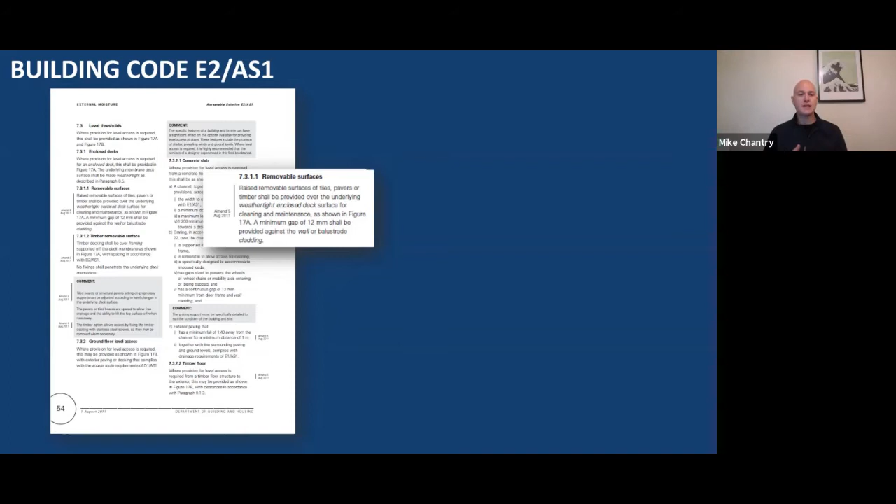When I was an apprentice, we just used to rip our joists down, staple some supercourse to the bottom, chuck them on the membrane, yahoo, we were done. But the building code changed, and it says now that it has to be raised and it has to be removable. So you can see in the section drawing there, figure 17A, there's the deck structure going over a membrane. So as you know, H3.2 joist, decking on top, and you'll see that that deck structure is set on top of a pedestal, so it's raised off the membrane.

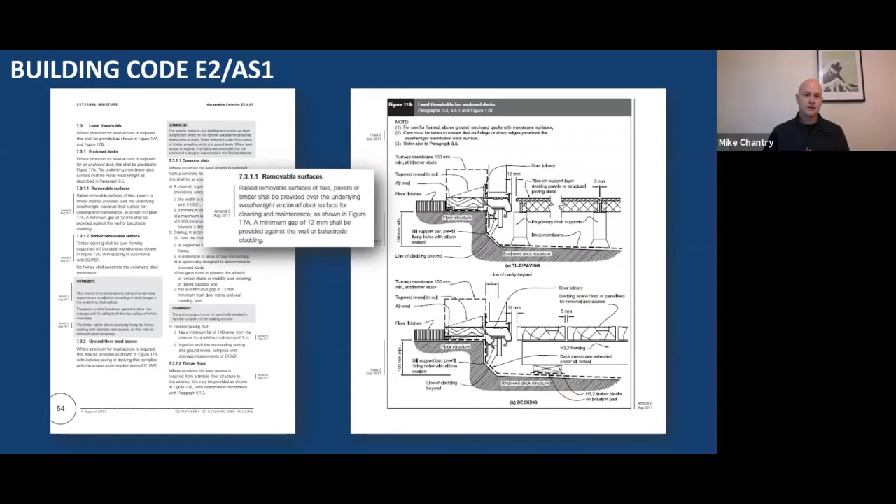So there we can see a level deck structure, a level entry, and that is supported by the Nurajack decking pedestals. So one, it's raised off the membrane, it's not sat on it, so that water can flow freely under there, and those joists aren't going to suck up any moisture that's sitting on the membrane. Two, it's removable, because those decking boards will be screwed down to the joist, or they'll have some type of clip system. So the decking can be unscrewed, the boards can be removed, and then that drain and gutter can be cleaned out and maintained and then replaced.

Now you'll notice too that the building code requires a 12mm gap from the edge of the decking to the cladding. And you know the reason for that: if you jam up your decking against the weatherboard, then water's going to sit in there and rot out the weatherboard or it's going to rot out the deck. So it needs that 12mm gap so that water can flow down and then out the membrane.

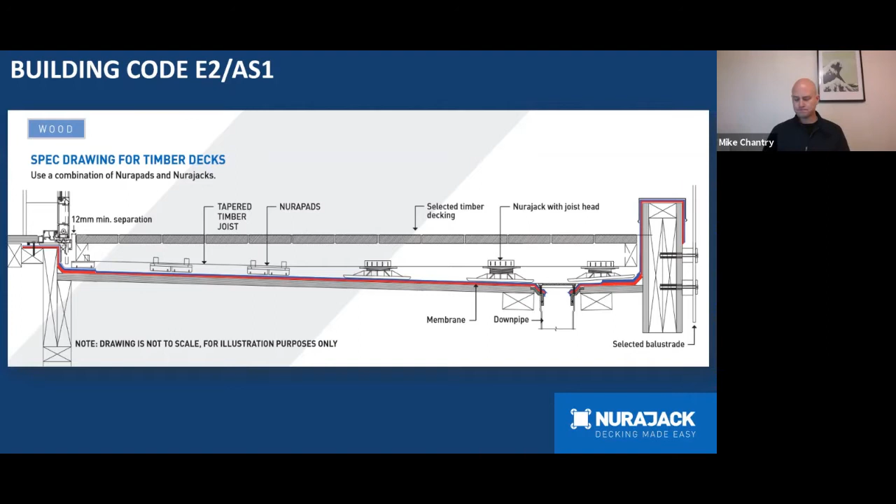And later on in our webinar, we'll talk about the products that achieve that as part of our Nurajack decking system. So that's low profile decks going over membrane. But also part of the Nurajack decking system, we have a Nuraspike and Nurajack, and this is used for doing low profile decks going over grass or going over dirt. You might have seen the Nuraspike newly released on the market just a few months ago.

Now, as you know, decks under 1 metre don't require a permit. However, that doesn't mean that we can just build the deck however we like. So even if a low profile deck doesn't require a permit, it still has to be built according to the New Zealand Building Code. So our foundations, the size of our bearers, the spacing of our bearers, the spacing of our joists all need to comply with the building code.

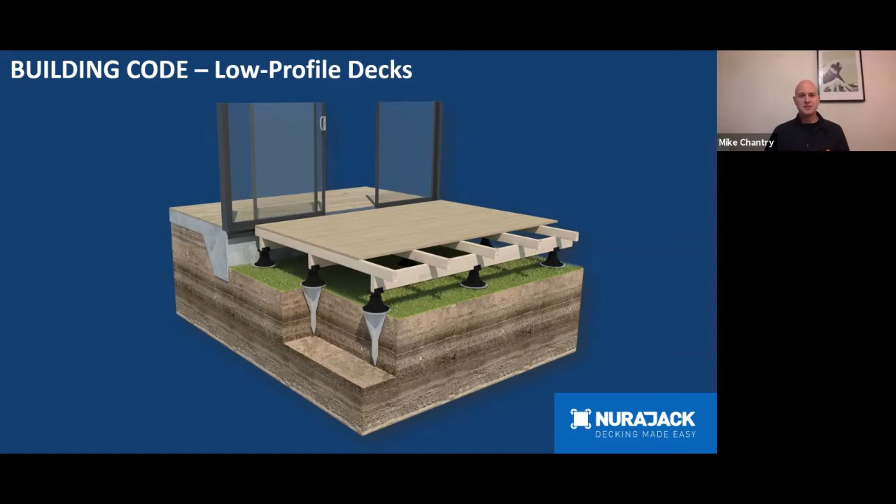So then just to review that section, why do we need to use Nurajacks according to the building code? Well, anything going over membrane has to be raised and it has to be removable for cleaning and maintenance. And even though a deck is under 1 metre and doesn't require a permit, it still has to be built according to the code.

So the next feature of our webinar is we're going to talk about some features of the Nurajacks. You might have seen the Nurajacks before or used them before. You'll notice the wide base of the Nurajack and then those fins that go up the side of the Nurajack. That means that we can put 1 ton of weight per Nurajack and it will spread the load out over the membrane. So if there's a spa pool or maybe an outdoor fireplace or something like that, the Nurajack can handle that load and spread it over the membrane so it doesn't point load and damage that membrane.

Also, the Nurajacks are easy to adjust the height of just by winding the thread up and down. So it's pretty simple and straightforward. And then you'll notice there the 35mm upstand on the head of the Nurajack. There are some holes in there so the Nurajack can be screwed into the joist and then that's all locked in place.

Now, one of the great features about the Nurajack, and something that all builders really love, is the self-leveling head. It can self-level up to 4.5 degrees, and that works on a ball and cup type scenario. So you might have maybe a valley on a waterproof membrane deck, or maybe there's a bit of a dish in the concrete. Well, that self-leveling head means that the base of the Nurajack is going to sit hard on the membrane, and then that ball and cup type design will take up the fall any which way,

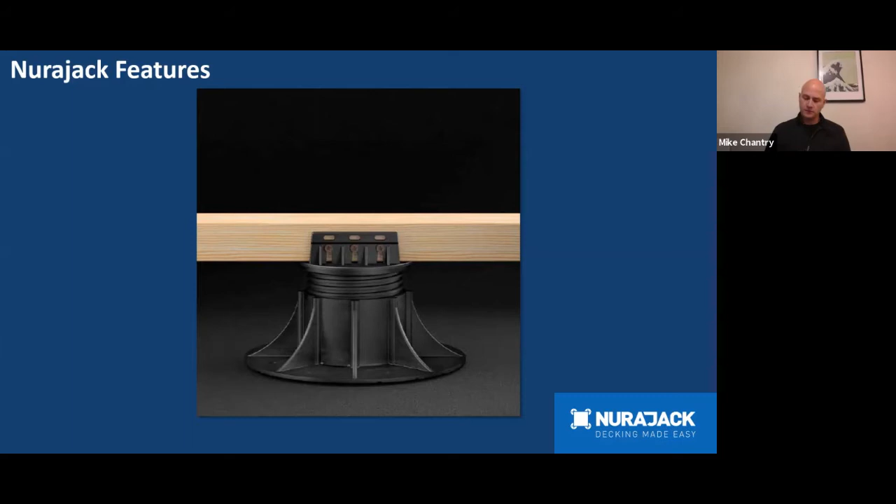Now, our range of Nurajacks goes from our smallest self-leveling Nurajack, which is the SE0. Wait, computer problems, getting late. Which is the SE0, and that starts at 28mm. And then we go all the way up to 550mm, so plenty of height there.

Now the SE0 to the SE5 is made up of a base, a thread, and a head. And you'll see these codes that are stamped on the base of the Nurajack and also on the thread of the Nurajack. Now the SE0 through to the SE2, these components aren't interchangeable with other jacks. They have to go together to make up those jacks. But the SE3 base is our tallest base, and that does the rest of the range of the Nurajacks.

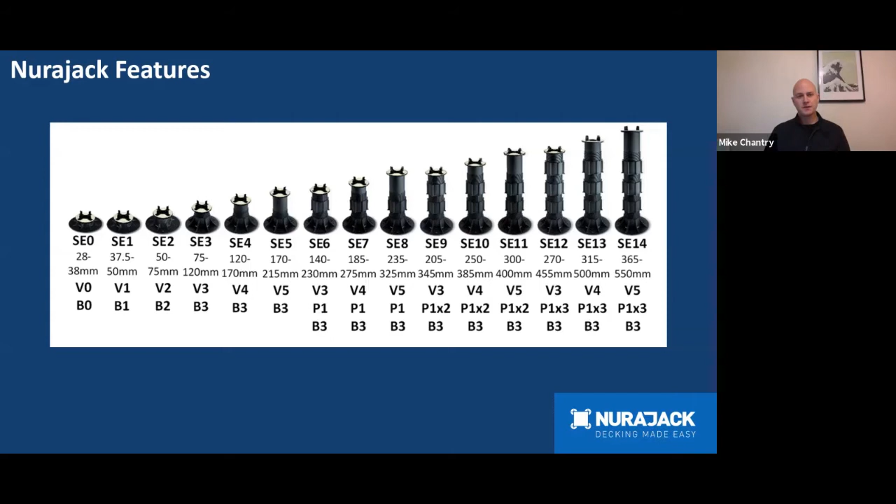Then where we get our additional height in the Nurajack is by adding an extension element. So we can go 1, 2, and then right up to 3 extension elements to get that 550 mils. So all of those jacks take 1 ton of weight. They all adjust using the thread, so winding it to height, and they all have a self-leveling head up to 4.5 degrees.

Now, our lowest profile Nurajack is the Nurapad, which is a 12mm disc, and that sits straight on the membrane. And then the joist, be it a timber joist or an aluminium joist, sits in between the tabs of the Nurapad, and that holds that into place.

Now the Nuraspike, we talked about that before, being used for low profile decks going out over grass or going out over dirt. And that's a 550mm long ground spike that gets driven into the ground using a sledgehammer, and then the Nurajack sits on top of that ground spike. Now each Nuraspike can withstand loads of 500 kgs per Nuraspike.

So the New Zealand Building Code requires 2 kPa loading on a deck. When we did our testing using the Nuraspikes and the structure that we built, we achieved 20 kPa loading. So it can handle heavy loads that are put upon it, and it's not going to sink. It's made of 4mm galvanized steel, and that galvanized steel is going to last a minimum of 20 years in the ground. So think of that as your replacement pile for your low profile decks.

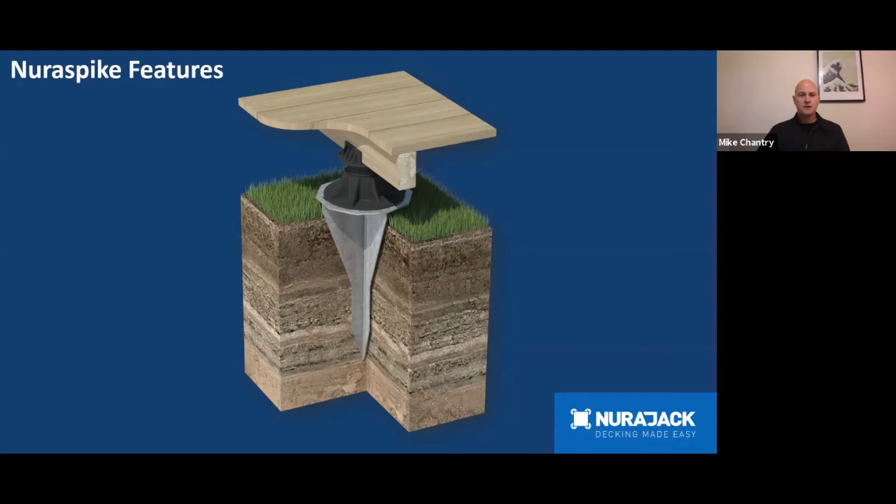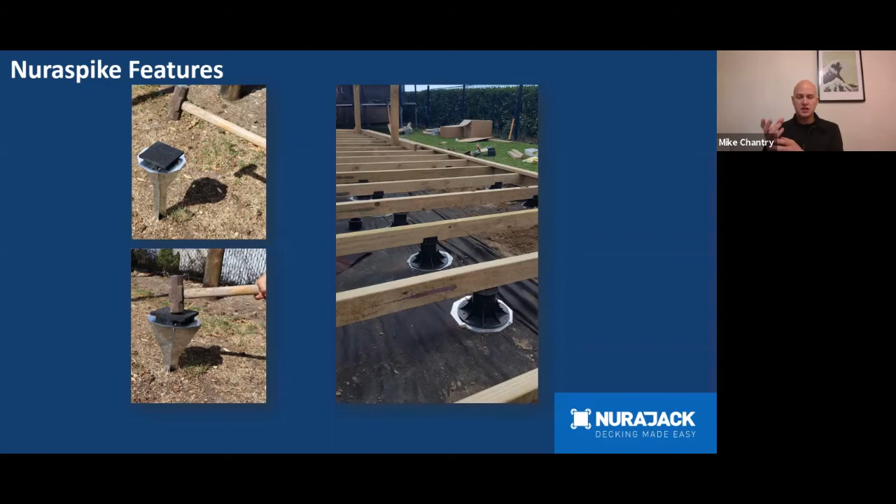So you can use a Nuraspike with a Nurajack directly under a joist, or you can use it under a bearer as well. So the head of the Nurajack is 85 mils, so you can fit a double bearer on there. If it's 90 or 100, that's cool. So again, think of that Nuraspike and Nurajack as your pile replacement. So there's a pile, Nuraspike, Nurajack, then you got a bearer on there, or you can just put it directly under the joist. Up to you, and it depends on how much height you've got.

Nurajack system also has tiles. We do a lot of tile jobs, and Lewis is the man to talk about this. Thanks, Mikey. I won't say much about this other than the jacks have the same feature of the self-leveling head, same loading, weight, and they have a special acoustic pad that's actually on top of the jack, that white rubber there that minimizes footfall. They're also adjustable without lifting the jack, and instead of winding the base like you would with a timber joist, you actually use an adjustment key.

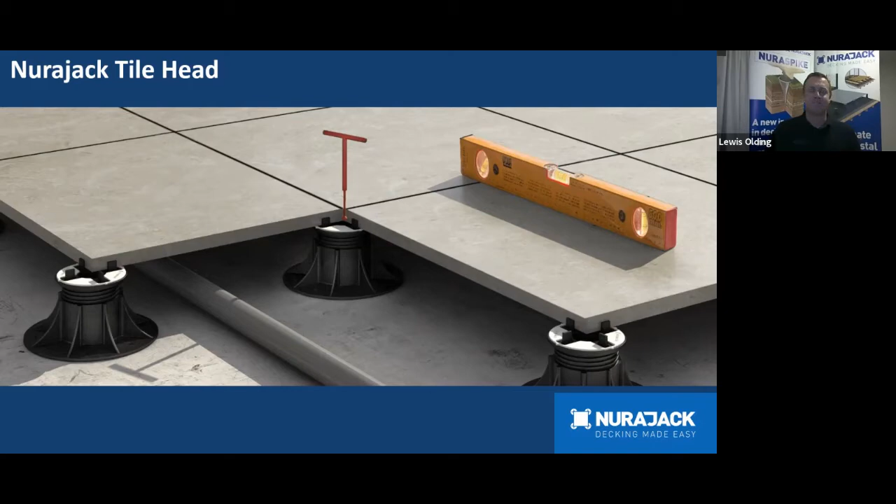Thanks, Mike. Cool, thank you, Lewis.

So our next part of our webinar, as Lewis mentioned, is installation. A little while ago, we made a video of us building a deck using Nurajacks and the Nuraspike. You might have seen that video. It's on our website, also on YouTube. We use it as training, doing in-store training, and also on Instagram, things like that.

So a couple of options they could have done to build a deck: cut up the concrete, get a digger in, rip it all out, pay to dump it, big mess, dig holes, put piles down. Or they could have cut holes in the concrete, then dug holes and then put their piles in. Or what we did is use Nurajacks and put the Nurajack straight on top of the concrete. Because that concrete was in good nick, right over the concrete area, we put Nurajacks down.

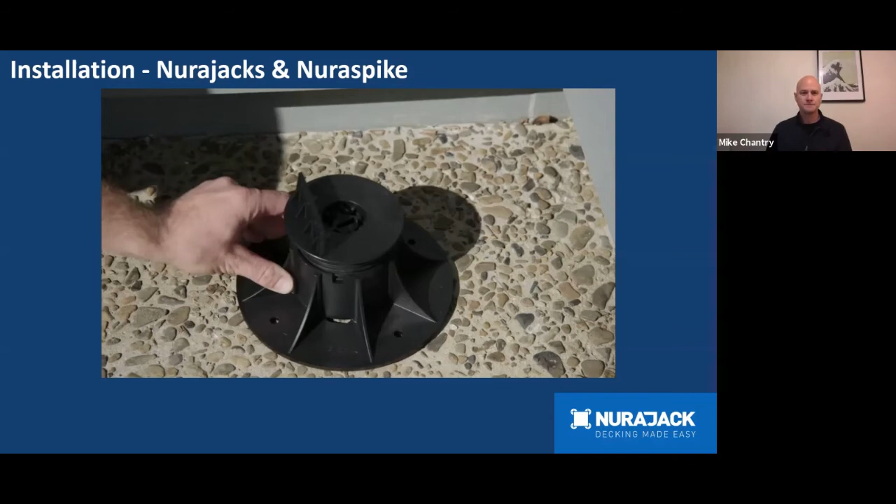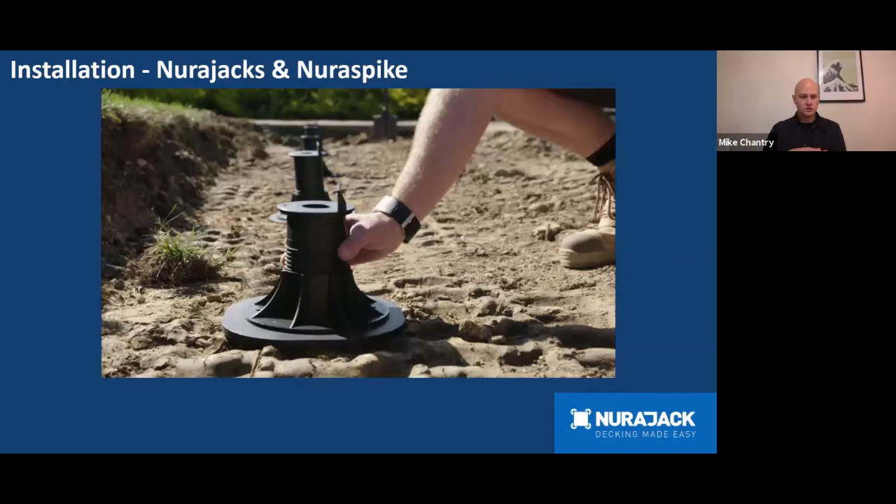That concrete was all falling to a drain, but again, the self-leveling head took up that angle, so we didn't have to cut any packers or rip any joists or anything. Nurajack straight on the ground and then joists on top of that. Where we went past the concrete and onto the grass and the dirt section, we drove Nuraspikes into the ground and then put our Nurajacks on top of the Nuraspike, and we used that section to form a bearer. So that was the very outside of our deck that we used to support our joists.

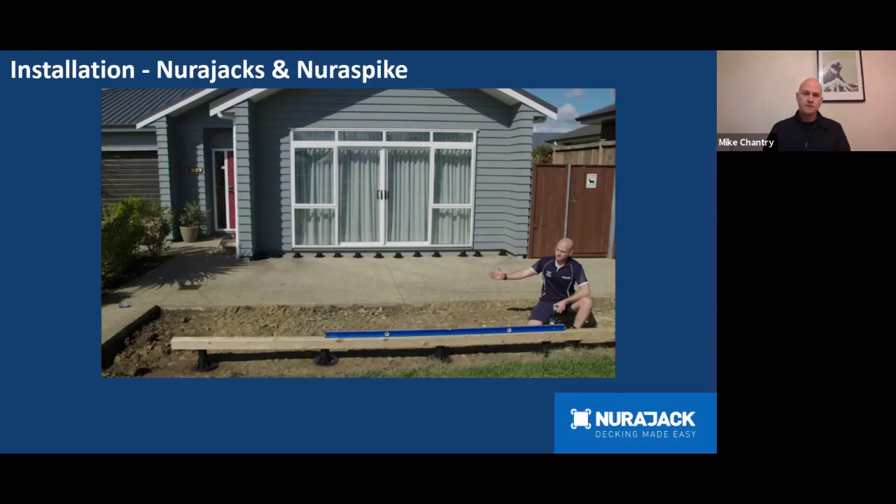Now, this is the part that you're really gonna want to take note of, is how we set it up. So we've got our line of Nurajacks going along the house there, and those are all wound pretty close to height. And then we've got our bearer at our perimeter, which is level and straight. Then from that point, we run all our joists out, sitting our joists on this Nurajack and on the bearer. So rather than running a line of Nurajacks down the line of the joist, sitting the joist on, it rocks around, tweaking each joist, just set your perimeters up.

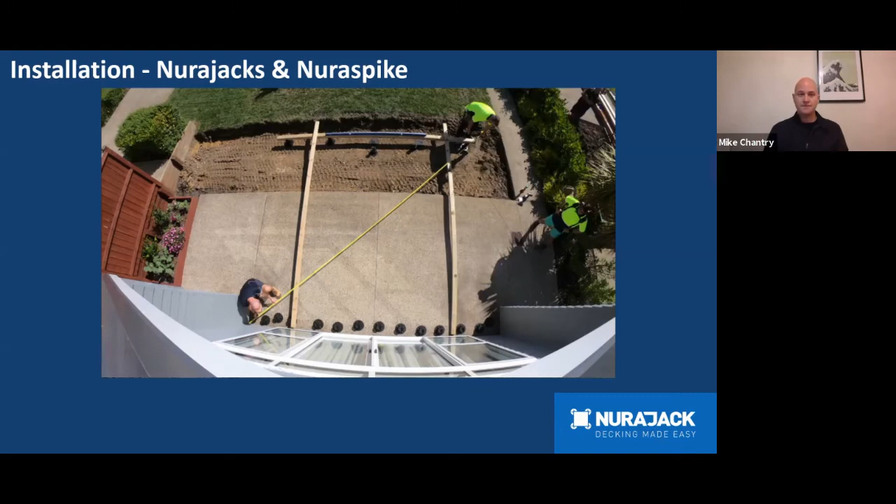So set up the Nurajacks along the house, then do your bearer, get that level and straight, then just run all your joists out, and then at the perimeters again, get those points level and straight, fix them in, and then come through afterwards, screw the Nurajacks to the joist at the centers like we've done there, and then wind them down, and then you can use those points to straighten your joist. So stringline, a Dodger block or a laser through the center, and do it that way.

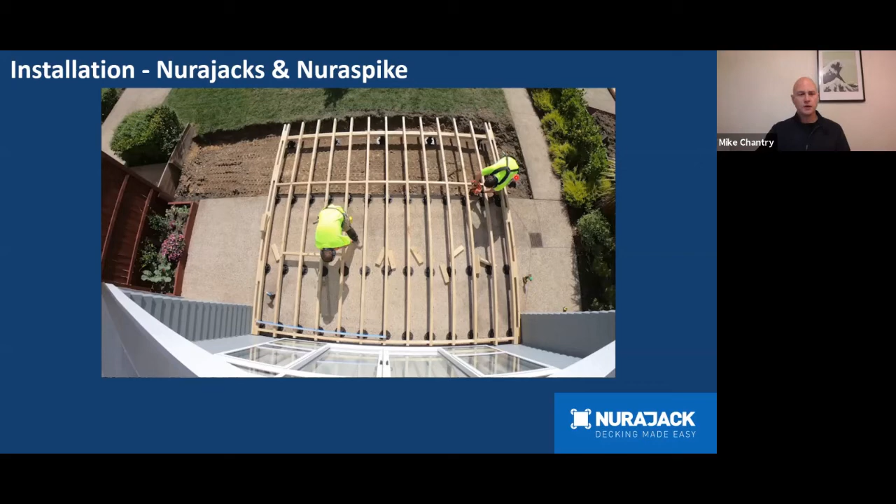So rather than setting up a whole line of jacks, putting the joist on, do your perimeters first, get that level and straight, and then you can come through the center afterwards and just tweak it as you go. So you can wind each one up and down as you need to. It means you don't have to do any planing if the gauging in the joist is different. Then you can see we've just done solid blocking through the joists. That's good practice. Boys are laying the decking there.

We use 140 garapa for this, and just remember to keep your spacings between your decking boards as well. For 140, the spacing is 6 mils. For 90, it's 4 mils. Quite often you see guys really like to jam them up, but when the board swells, that puts pressure on the joist, and it has a tendency to want to lift. So if you keep those spacings, then that's cool.

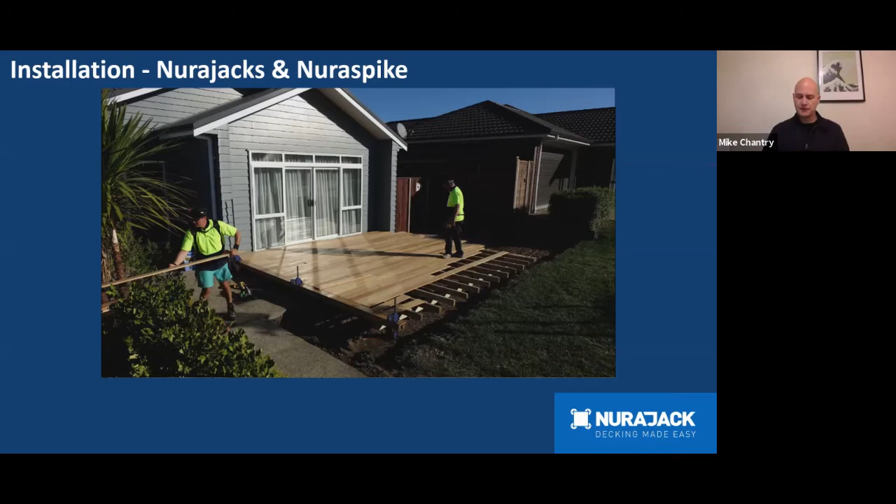And then finished product. So you can see there, this deck structure is contained by the house, and it's contained by this raised garden at the front. We get a lot of questions. Do I need to fix the joist to the concrete? Do I need to fix it to the Nurajack or the Nuraspike, sorry?

The deck that we did here, it's purely a floating deck. So no Nurajacks are fixed to the concrete or to the Nuraspikes. It's not fixed back into the house. It's a floating structure. So do you need to contain it? Well, I guess it depends on the size of the deck. If it's quite a big deck, it's not going to go anywhere.

The weight of it is going to hold it in place, but nothing to stop you from putting some fixings in, fixing the jack to the spike, or if you want to put a couple of ordinary piles in around the perimeter, that's good for your working, help you to square it up and keep it in place, up to you. So we're not making any hard and fast rules around it. Whatever works for you in that project is cool, and that's going to work.

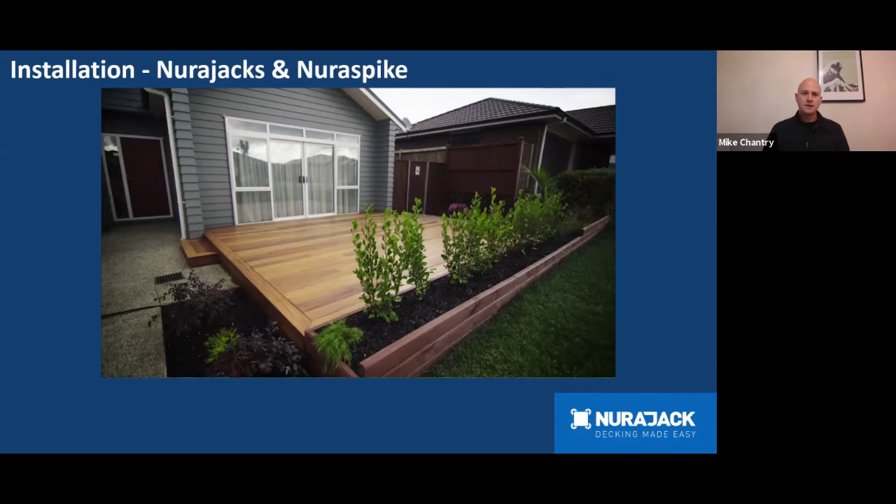Just a couple of principles around installation with regards to using the Nurapad. So we don't see this a lot, but you can do it, ripping the whole joist to the fall of the membrane, and then just sitting that joist in the Nurapad. So if you've got enough guts in your joist, you can rip it down and then sit it in the Nurapad. Just make sure though that you don't get too thin at the top end, otherwise the timber becomes less stable and it might want to tweak up.

This is the most common sort of thing that we see, Nurapads for the first meter. If you remember going back to the building code, usually you got 100 mil step down, but if you're using 4x2 and 20 mil, it's 110. So a little bit of the joist just gets ripped, sat in the Nurapad, and then once the fall of the deck gets greater, then you just go out to your Nurajacks.

And again, just to review, the Nuraspike just gets driven into the ground using a sledgehammer and the hitting plate, 4mm galvanized steel. So that's going to last 20 years in the ground. Nurajack on top, and then you can either use it to support a bearer and then put your joists on top of that, or if you don't have a lot of room, then you can just use it to support your joists. Lewis, you want to take over?

Yeah, give you a break, Mike.

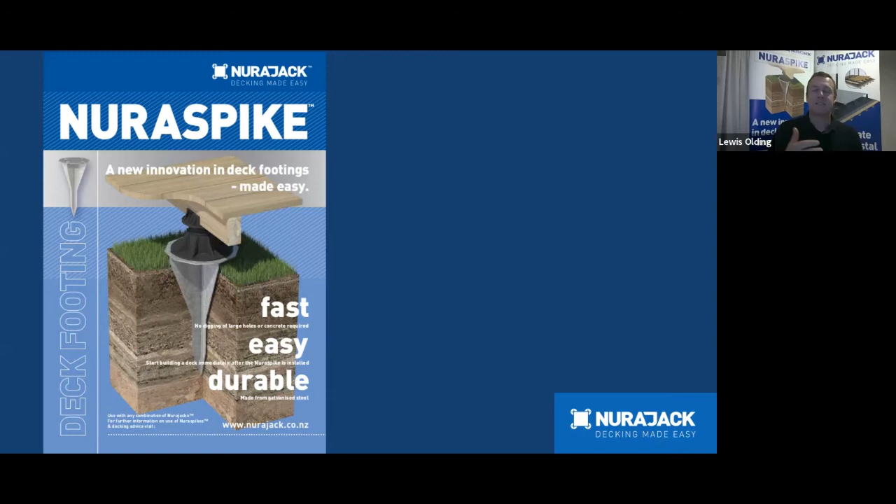So our brochure highlights some of those key features of the Nuraspike, that it's fast. And as Mike mentioned, we did that deck in two 4-hour goes really. So the reason why it's fast, you just drive it into the ground, you can build straight away. No waiting for concrete to cure or anything like that. It's easy. It's a lot easier to whack something into the ground than dig a hole, and it's durable. At least 20 years. We know it will go a lot longer than that.

They come flat packed, the Nuraspike. So on the back of the brochure and on all of our boxes, it shows the installation and assembly instructions. You just need an impact driver or a drill to be able to assemble them. And there are some precautions that we just want to run through with you real quickly if you're considering using the Nuraspike. You need to obviously check for in-ground services. It's not suitable for waterlogged soil, so swamp, that sort of thing.

Also, if there's a layer of rock, you're just not going to get through it. However, you get through a lot of roots of trees and that sort of thing real well because the galvanized steel is actually quite sharp. So you don't have to take too much precaution around trees and that sort of thing. You will get through it. I'm not sure if this tree will survive too much longer, but you'll get through it anyway.

You need to assemble the Nuraspike completely and use the hitting plate that's provided. If you don't use the hitting plate, it's loud because it's metal on metal with the sledgehammer, but it also will deform to an extreme degree the top plate of the Nuraspike. We expect, even with the hitting plate, some deformation of the head of the Nuraspike, but the Nurajack can certainly bridge that, and it's not really an issue. So some indentation's fine, and just use a hitting plate.

Ensure that the deck complies with all relevant governmental or local council requirements, and follow the manufacturer's instruction for the placement and structure of the deck that you're building. As Mike's already mentioned, if you rip the joists down too thin, the movement within the structure of the deck or the decking boards can cause the thinner ripped timber to bow. If you are really struggling for height anywhere, consider using an aluminium joist like Outdure's Quick Build system, and we're going to cover off a little bit of that later.

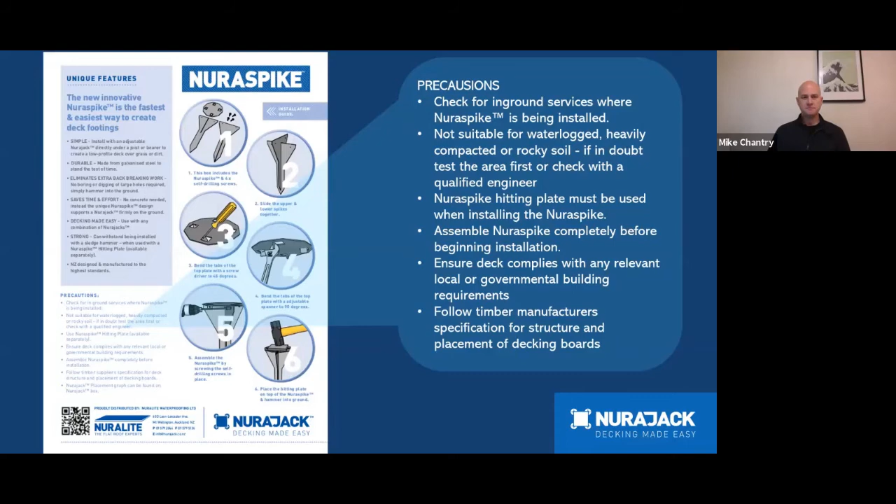Now, placement of Nurajacks under a joist. So we get asked this quite a lot. How often, how many Nurajacks do I need to use? How far apart do I need to place them? On the back of the boxes of 5 that you see at Placemakers is this placement graph. It's also on our website and in our brochures. So there's 2 different lines here. There's a light blue line, and the light blue line is your recommended spacing for going over membrane.

So say for example we're using a 4x2 joist over membrane, then we need to space the Nurajack at 600 centers down the line of the joist. So if this joist here is 4x2, then we're going 600 centers with our Nurajacks down the line of the joist. If it's 6x2, then we're going out to 800 centers. Now the reason for that is to spread the load out over the membrane, so there's no point loading on the membrane, and that will protect the membrane.

That's not your joist spacing. Your joist spacing is still governed by the size of your decking, but that's the Nurajack spacing down the line of the joist. Now the dark blue line there is for over other surfaces, like concrete or the Nuraspike. So if you're using a 4x2 joist again, and you're going over concrete or over a Nuraspike, then you can space your Nurajacks and your spikes out at 1 meter. So if this was just Nurajacks underneath that joist, then you could go 1 meter under every joist.

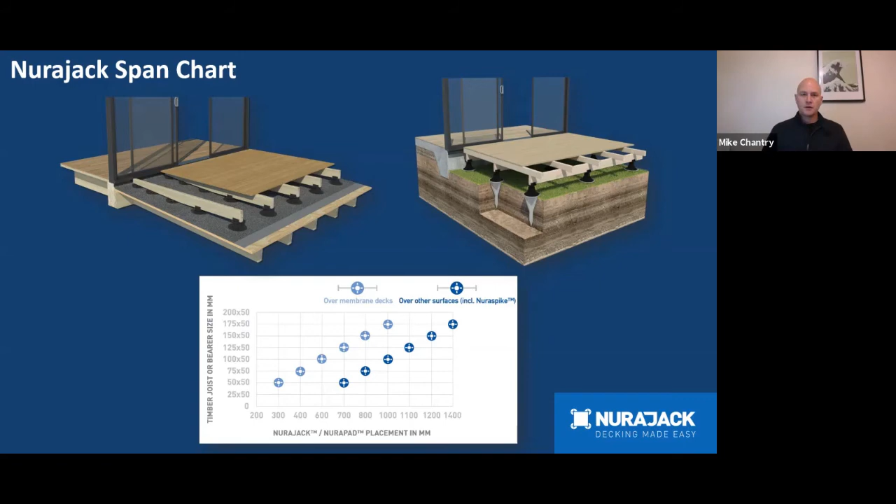Back to you, Lewis. Yeah, so I mentioned before the aluminium frame system that Outdure makes, and it's interesting when you look at what they do. They can put timber or composite decking on top of their aluminium frame. They can also put their tiles, they can match into that really simply, and even synthetic turf. The reason why they can do all that is because aluminium is inherently more stable. It's not affected by moisture the way timber is, and so there's less likelihood of movement within that structure.

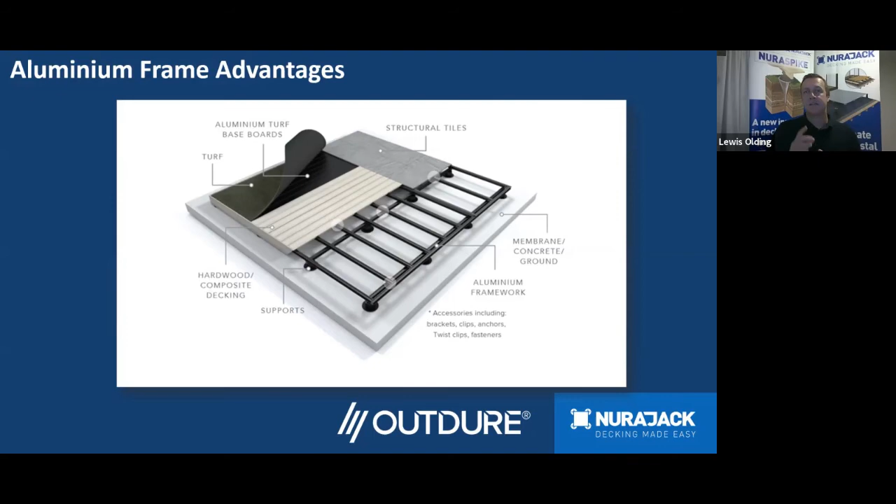The Nurajacks can handle a ton of weight. So using aluminium frame systems like Quick Build from Outdure, you can still put that sort of load on those jacks if you're spanning at those sorts of centers. Note too on this drawing, we see a spot footing as an option under a Nurajack, and that's more than acceptable. If you can't use a Nuraspike for some reason, you can use a spot footing quite satisfactorily, and we see that from time to time around the place. So that's just a few options around the aluminium frame system.

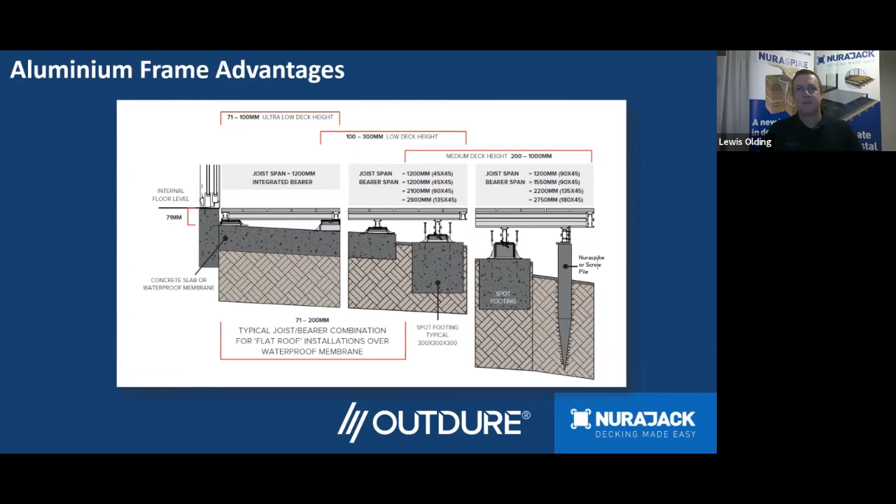Thank you, Lewis. Do you want to talk us through the new product as well? Okay. So this is a product that we developed recently. In New Zealand, as Mike highlighted, you need a 12mm gap around the perimeter of a deck. It's not required overseas. So this product here is required in New Zealand. It's basically, we call it a cladding clip.

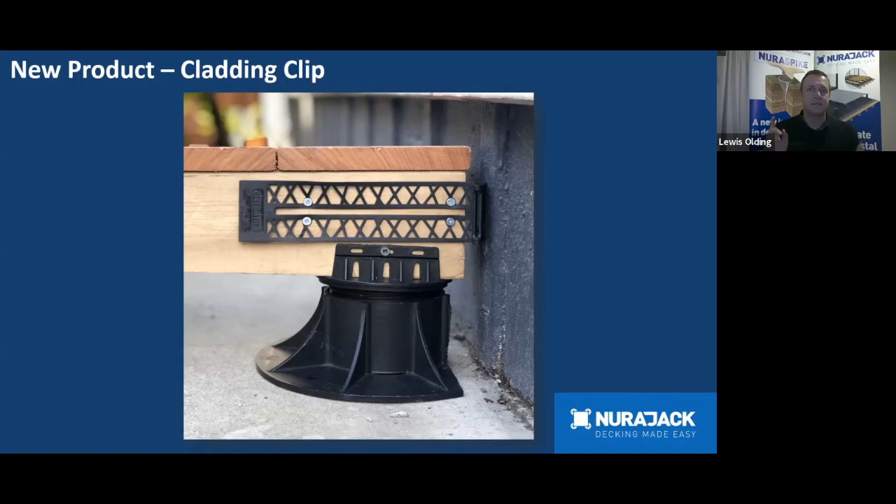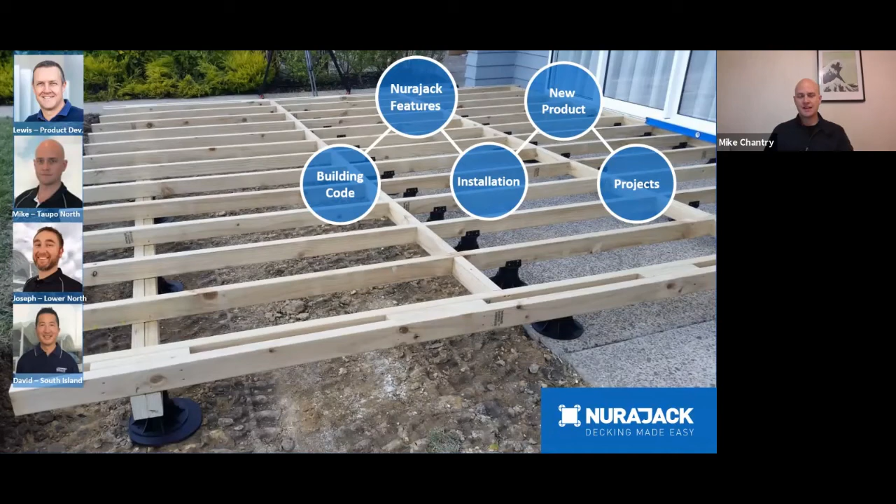Okay, well, on to the last section of our webinar, and that's projects. So we're going to look at a couple of projects that we've done using Nurajacks, and the first one is a rooftop deck. So this house construction, it's got a flat roof on top and sort of a couple of pods, and the owners wanted to make the best use of space. So instead of leaving it just with the membrane, they decided to put a rooftop deck on top.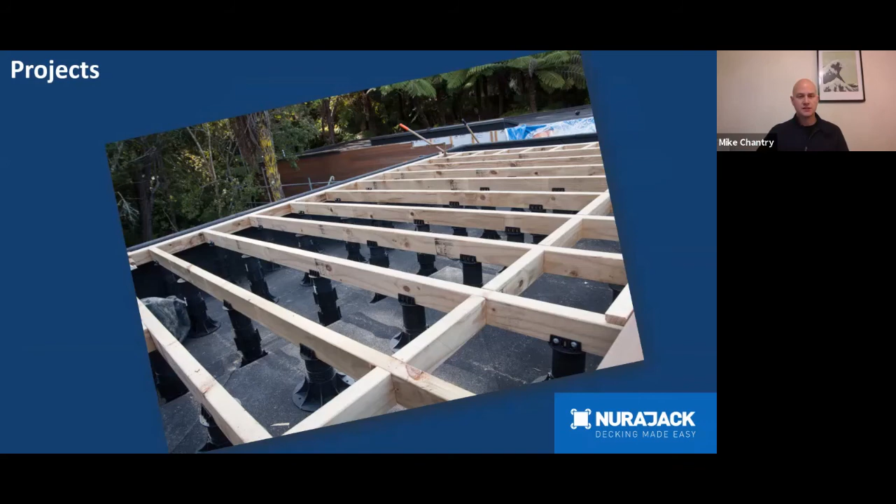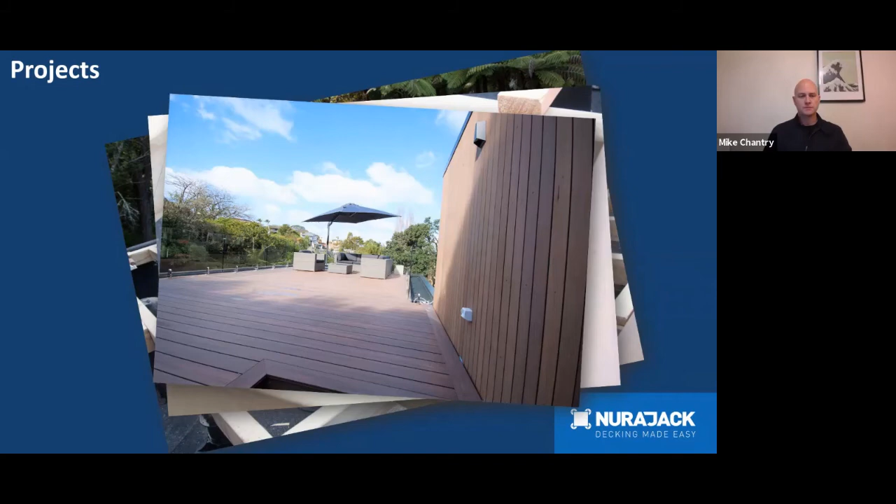So you can see the Nurajacks going on the membrane there, and then that deck structure, jacks straight down on the membrane, and then the finished product is just awesome. So really good use of space there, and real mint spot as well, real nice setting.

Our next one, Lewis, you want to talk through this one? Yeah, so this was on Instagram the other day by AP Builders. I'm not sure if you follow them. They were doing a low profile deck around a swimming pool, and you can see here that they've just run 2 rows of Nuraspikes into just some typical soil in the backyard, and then they installed it using a macrocarpa hitting plate, which we were more than happy with, to be honest. It still protects the plate enough to be able to receive the Nurajack.

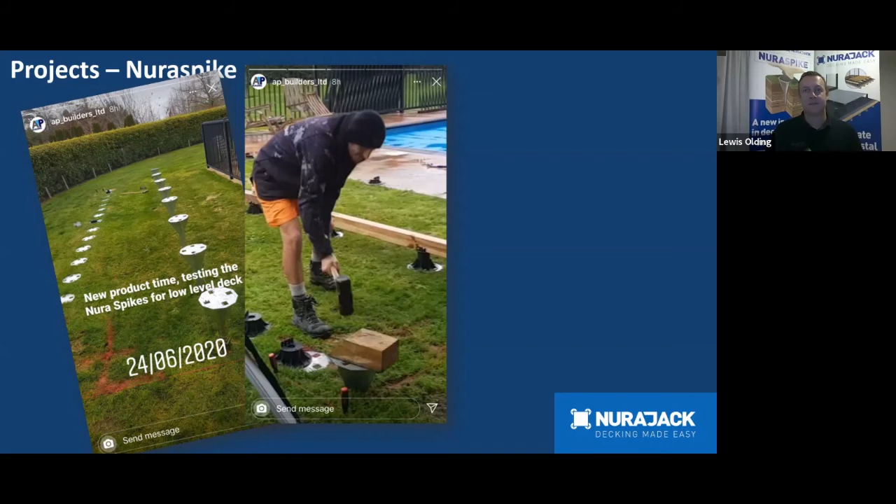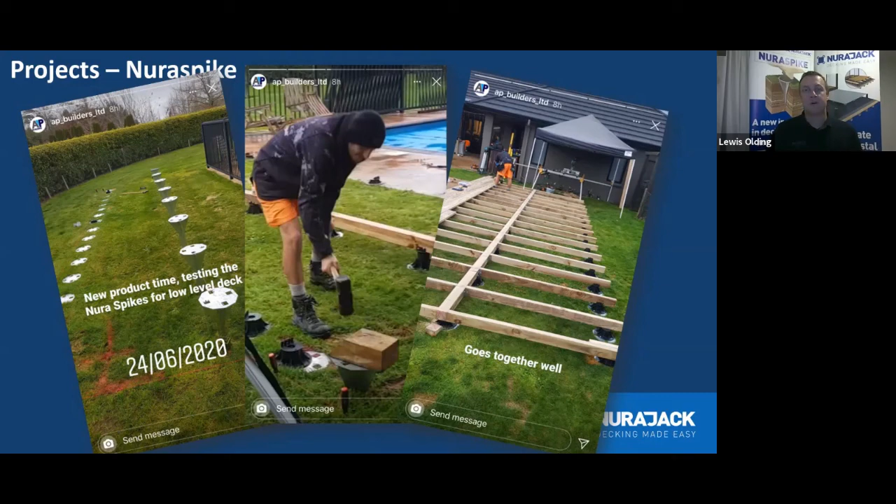And then they've run their joists out here, and they've got their decking going down. So real simple. One thing to note: no dirt lying around anywhere, no wheelbarrow full of dirt as they're having to dig the holes, no mess really compared to a traditional way. And they've got a real functional low-profile deck next to a swimming pool. It's excellent.

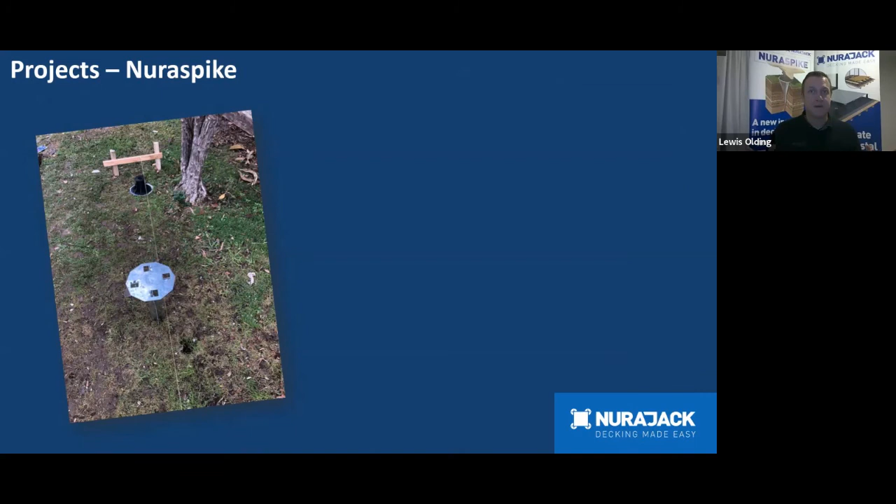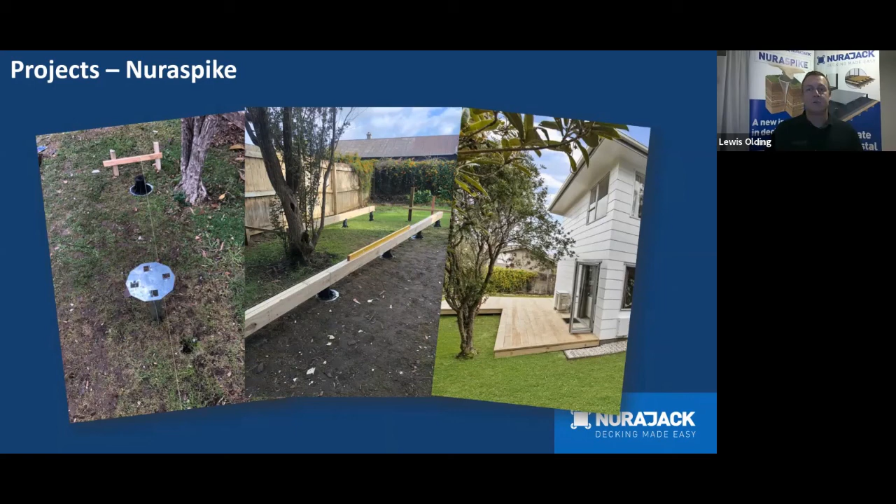The next one is a project that was actually in Mangere Bridge, a house that's up for sale. They wanted to dress up the backyard, so put the Nuraspikes in with a 6x2 double bearer, and you can see the spacings of the jacks being increased for that 6x2, and then there's the low profile deck dressing up the backyard there for a house for sale. So real quick, again, no mess, and real straightforward.

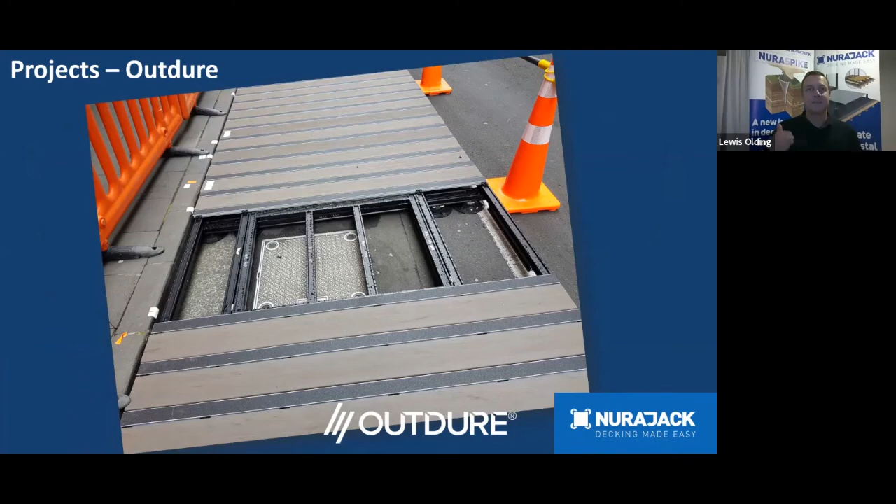Outdure have a number of systems that you might have seen if you're up in Auckland. This is in High Street, an extension of a footpath using an aluminium frame and their composite decking. Remember, the Nurajacks adjust, so they were able to make that whole walkway level wherever it went, no matter what the drainage was doing along that gutter's edge there. So that whole walkway is nice and level and no trip hazards. So that was a good solution.

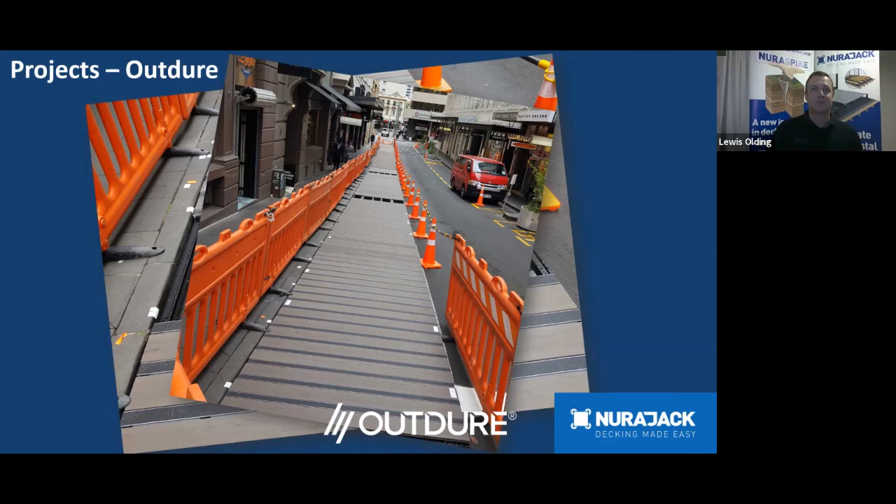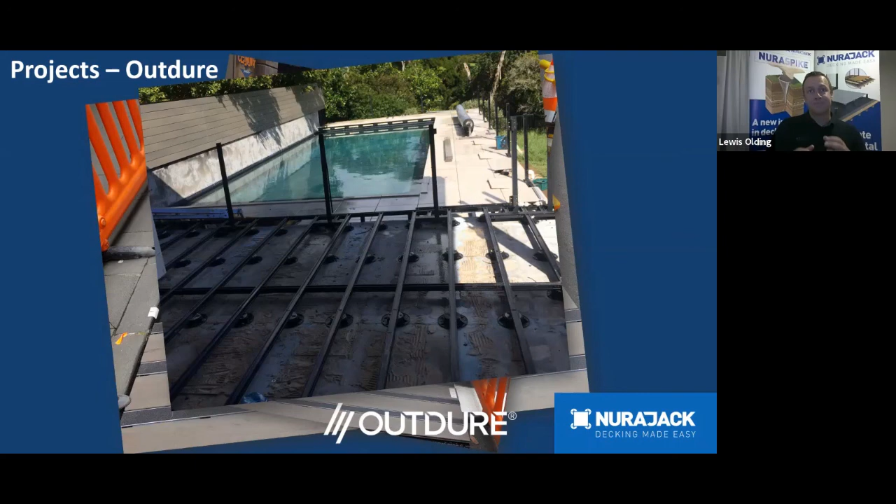And then finally, we've got one here for Outdure, which was over an existing tiled substrate. I don't know why they uplifted the tiles. They could have actually put the jacks over the existing tiles, but you can see here they've removed it. That brown stuff that looks like sawdust is actually tile glue. But because the jacks can withstand going over any surface, even if it's a little bit out of shape, they're strong enough, they just put the jacks down over that old tile glue and then put the aluminium frame and composite decking on top.

So that was another nice project. Yeah, looks mint. This one here was a couple of customers. They wanted to sell their house, but they had exposed concrete around their pool, and it was starting to break up and look tired and a bit ugly. So rather than getting a digger in, ripping it all out, they just put the Nurajack straight on top of the concrete, put some joists down, and then built a timber deck on top.

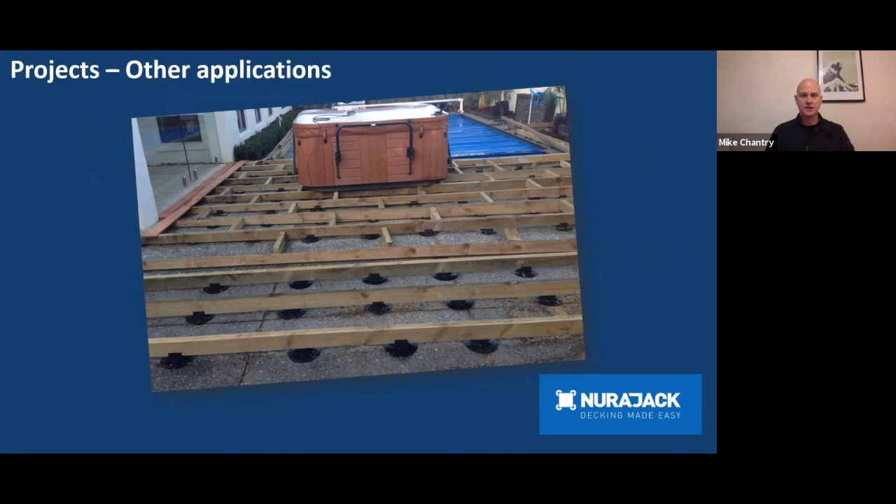You can see a spa pool at the top of that picture there, so those Nurajacks can easily withstand that load. And then the finished product with the decking down looks mint. So a simple solution to what could have been a big job.

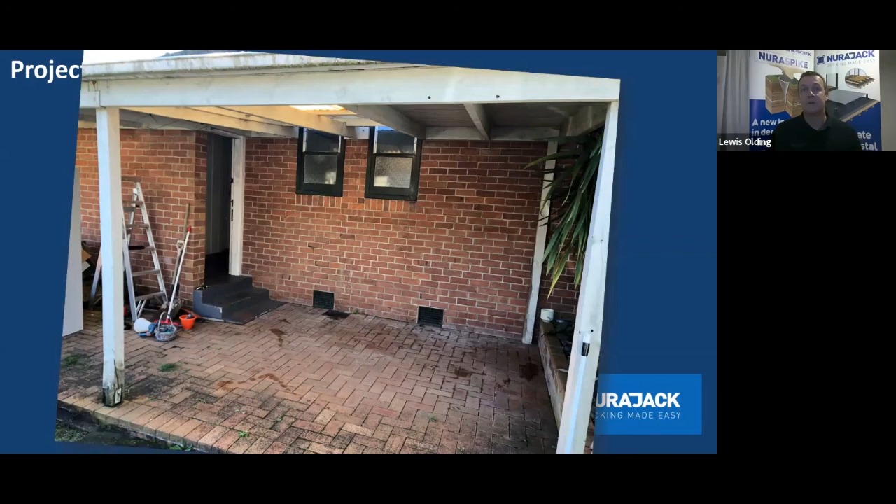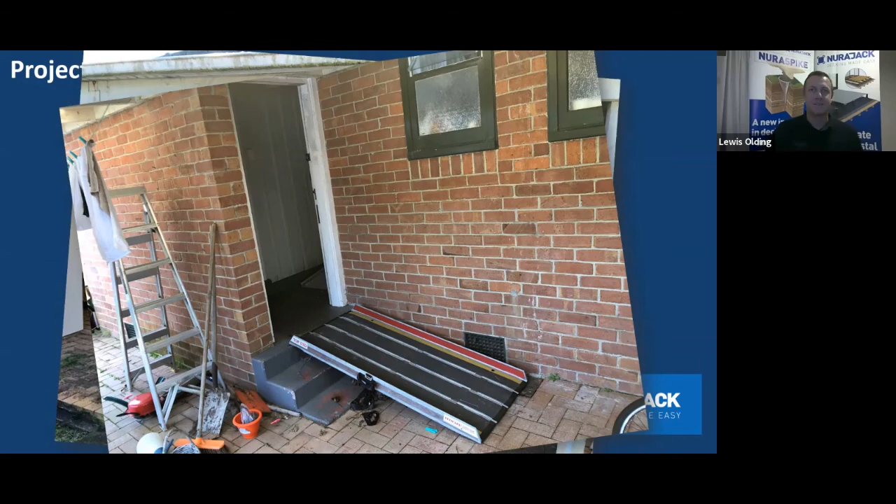And this final project that I would like to highlight, you can see, this is a house of a young girl. She's about 17, 18 years old now. We did this about 4 years ago. She ended up in a wheelchair as a 13-year-old, and her access into the house was this aluminium ramp, but she still had another 150 mil step to get into the house in the little entranceway here. It just wasn't really suitable for her.

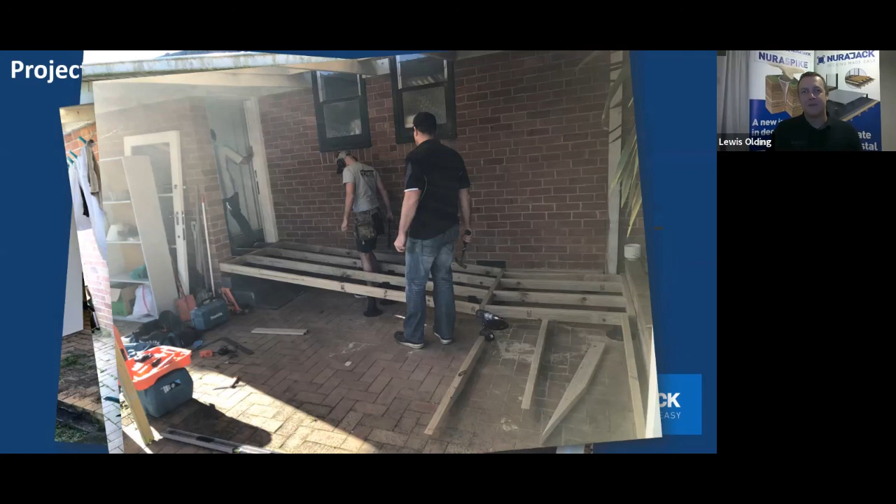So we heard about it through the managing director. His friend told us about it. Mike had just joined the company, and being an ex-builder, we put him straight to work so he could learn a bit more about the Nurajacks. And here's the frame that he's building for the ramp. And there's the managing director of Nuralite, John Simmons, making sure that it's level entry for the family.

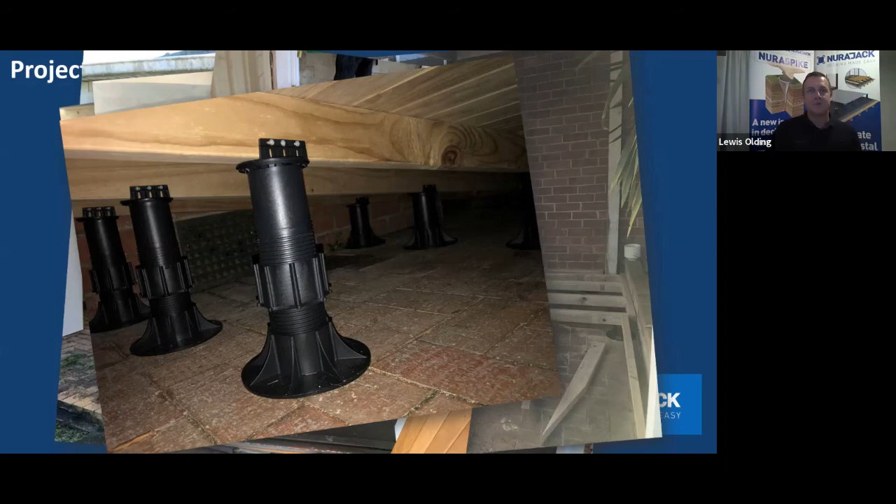See the 4x2 just on Nurajacks there, no nogging in that one. Just the decking holds it in place, and then the Nurajacks there. Now, because the ramp was less than 4.5 degrees pitch, we did the ramp solely out of the Nurajacks, so there was no need to muck around too much. The whole system's not affixed to those bricks that are laid down as cobbles. The whole system is floating. It's not affixed to any of the walls.

And when the young girl came out and saw this, for the first time she was able to gain access to her house, she came down that ramp just on her back wheels. She was so happy, and it was a really neat thing to see, actually. So it's a project that we're really happy about, and it just shows the versatility of the Nurajacks.

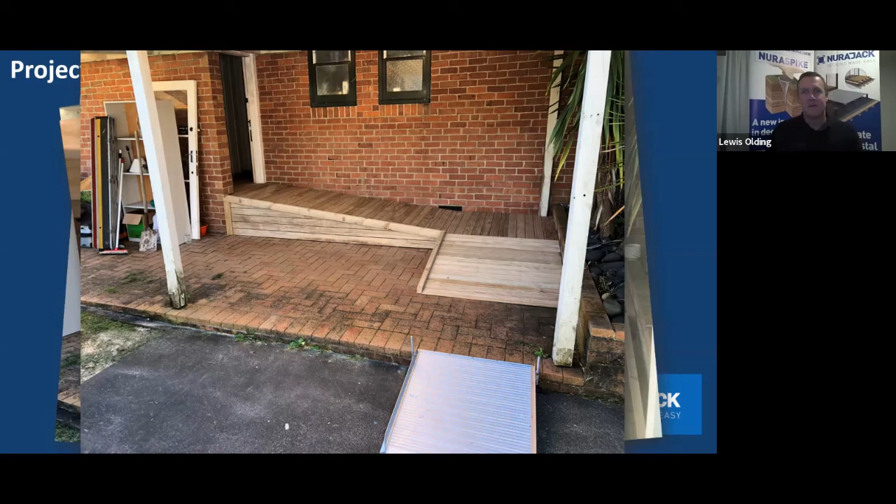You know, people are putting relocatable buildings on them, containers are going on them, tiny homes are being built on them because they're adjustable, self-leveling. They're suitable over most substrates. So that really brings our presentation to conclusion.

We haven't had any questions. So Mike, you've done an excellent job. This is your third go at this presentation, mate. So you've been improving all the time, answering all the questions as we go. Just warming up. Just warming up.

Well, I'm just going to launch a final concluding poll while I talk through this last slide. The nurajack.co.nz is your resource for any extra information. Videos that Mike's talked about, along with other videos like how to assemble a Nuraspike, photos of other projects, all annotated with different points to note and references, so you can make good decisions on how to set out, for instance. They're all there under the gallery. There's the technical download section, which is all the technical drawings in PDF, DWG, DXF. All of our other documentation is downloadable there.